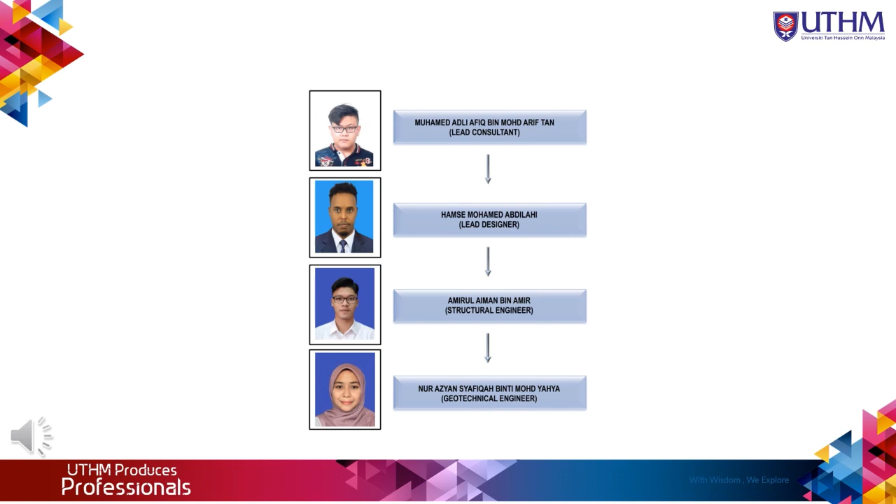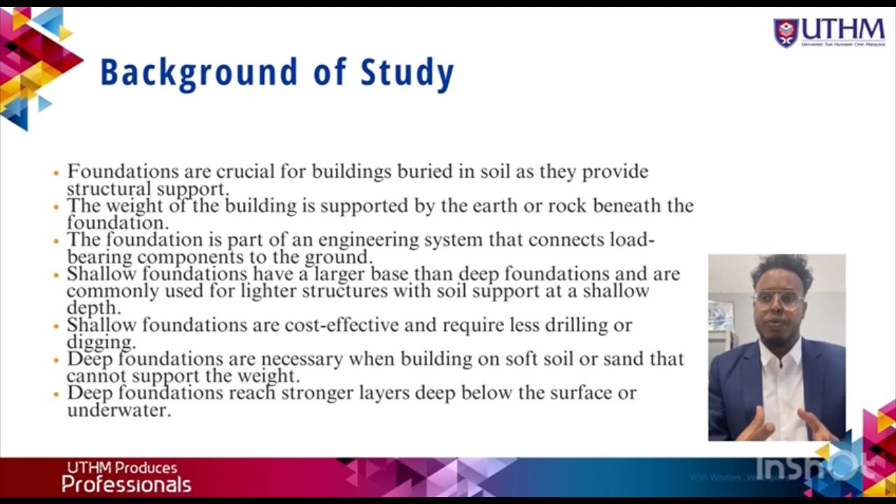Background of study. Foundations are crucial for building in the soil as they provide structural support. The weight of the building is supported by the earth or rock beneath the foundation. The foundation is a part of an engineering system that transfers load-bearing components to the ground. Shallow foundations have a larger base than deep foundations and are commonly used for lighter structures with soil support at shallow depth. Shallow foundations are cost-effective and require less drilling or digging. Deep foundations are necessary when building on soft soil or sand.

Maju Engineering was incorporated in December 2015. The company is located at Pakit, Johor Bahru. Since its formation, the company has been providing civil and geotechnical engineering services to government agencies and private sectors. The company provides specialized services right from site investigation, soil and foundation, soil laboratory, concrete testing and coring.

Project background. The project focuses on the foundation for a water tank tower with a capacity of 100 tons of water. The location of the project is at Taman Setia in Johor Bahru. The company carried out research on the suitability of the foundation depending on the existing soil at the location. Secondly, site investigation has been conducted on the site. As you see, this figure shows the site location.

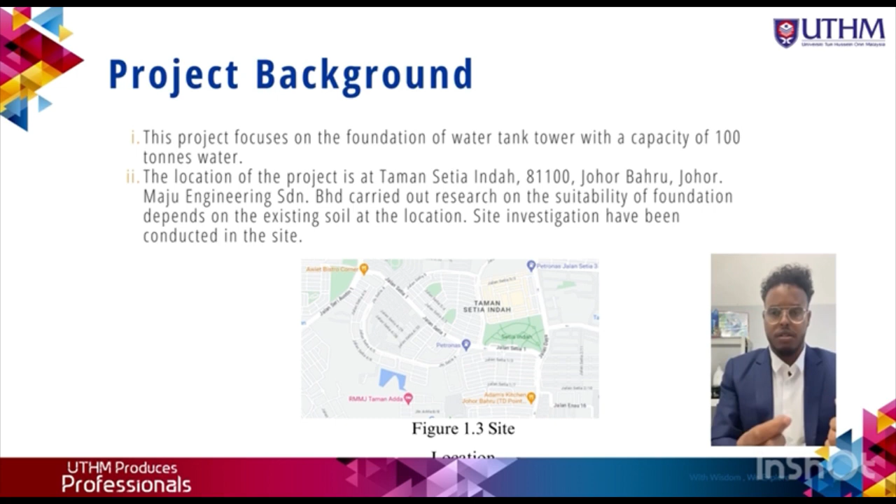Objective. This project includes the objectives listed below. First, to calculate the value of ultimate bearing capacity and settlement. Second, to design the foundation for the structure to obtain necessary information on the subsoil condition.

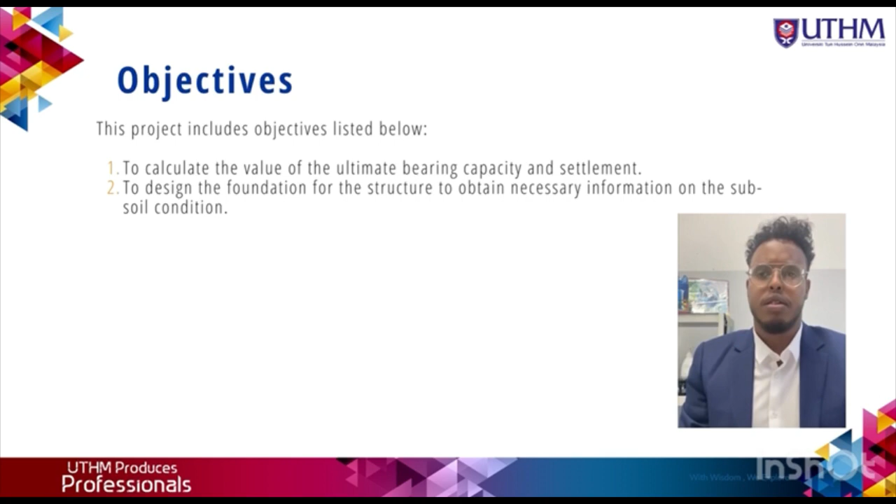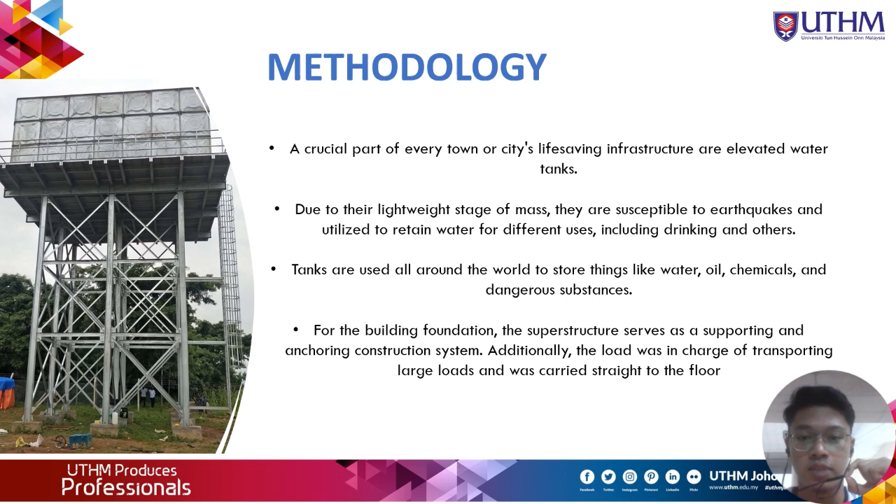Methodology. A crucial part of every town or city's life-saving infrastructure are elevated water tanks. Due to their lightweight staging mass, they are susceptible to earthquakes, and they are utilized to retain water for different uses, including drinking and others. Tanks are used all around the world to store things like water, oil, chemicals, and dangerous substances. For building foundations, the substructure serves as a supporting and anchoring construction system. Additionally, it is in charge of transferring large loads straight to the ground.

Water tank specification. We need to design the water tank using ESTEEM software and include the load values involved to get the load that the foundation needs to accommodate. The specification of the water tank is based on the load that needs to be accommodated, which is 100 tons. For our water tank specification, the width of the tank is 6 meters, length is 6 meters, area of water tank is 36 square meters, and the total elevated water tank height is 13 meters.

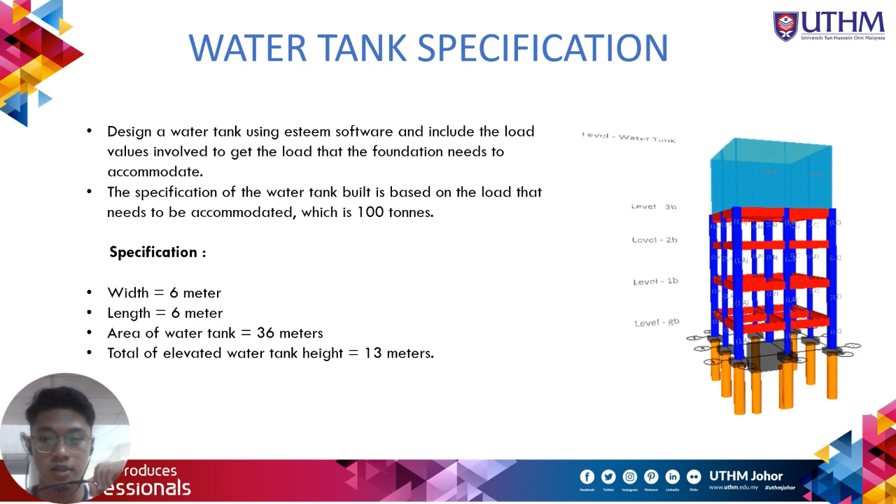Now we move on to data collection. The values for this project were obtained by referring to the Eurocode 2 standard. The structures are subsequently examined using manual calculations and ESTEEM software, especially for foundation design and settlement verification. In order to produce a suitable proposal for the foundation design in this project, the data from ESTEEM and manual calculations are also compared. So these are the pile foundation key plan and also the load on pile from ESTEEM software.

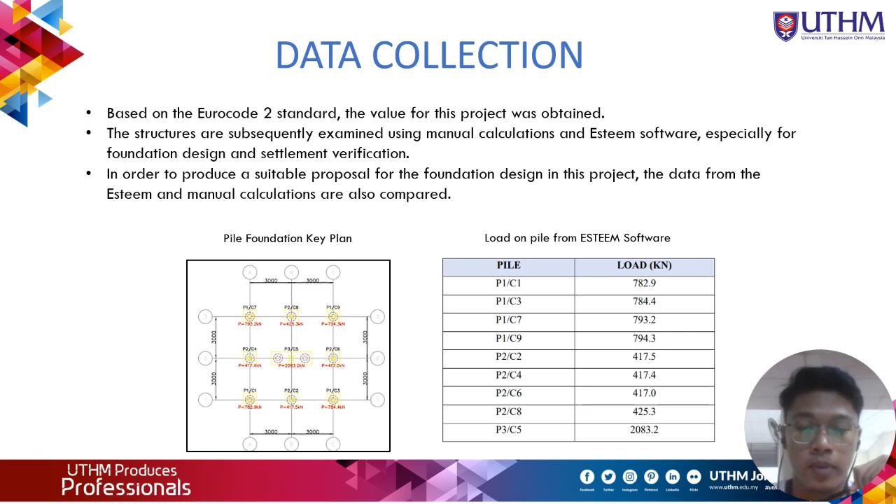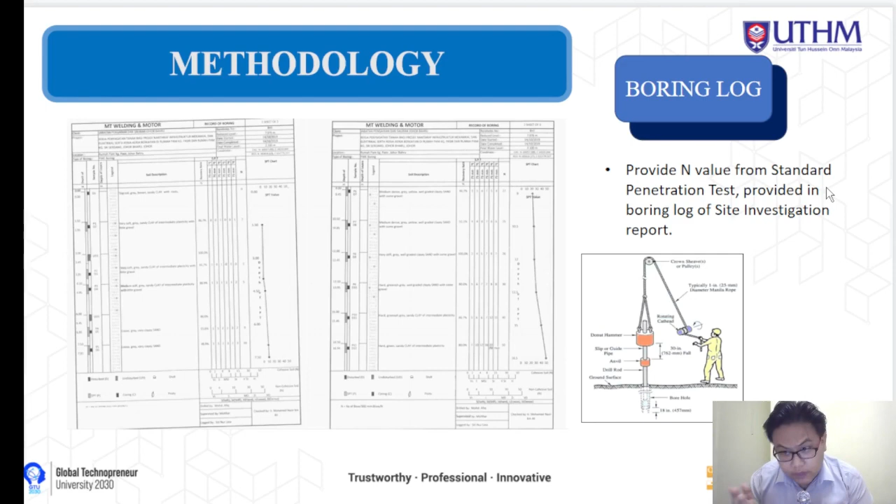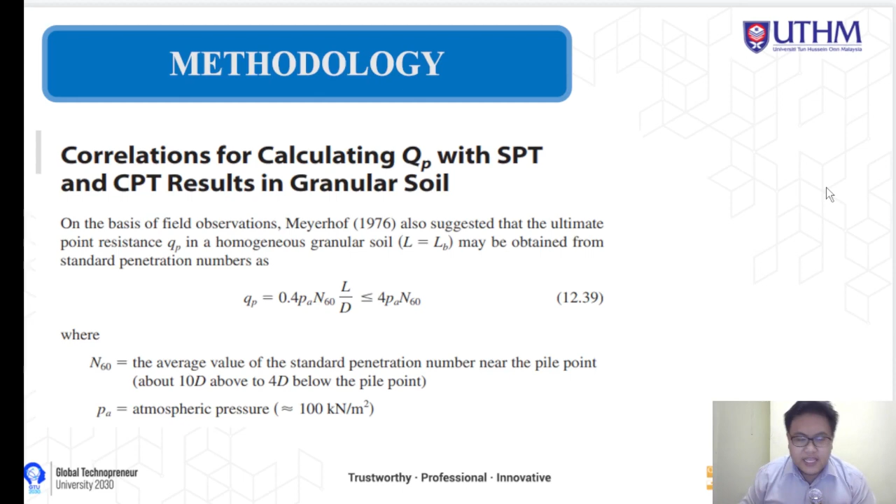Okay, hello. My name is Muhamed Adli Afiq, and I will talk about the methodology of the project. Since the site investigation report boring log provided the N value from the standard penetration test, we can use the Meyerhof equation, which correlates with the SPT result, for Qp. Qp is the pile point bearing capacity, and also Qs, which is the pile frictional resistance, which correlates with the SPT value using the Meyerhof equation too.

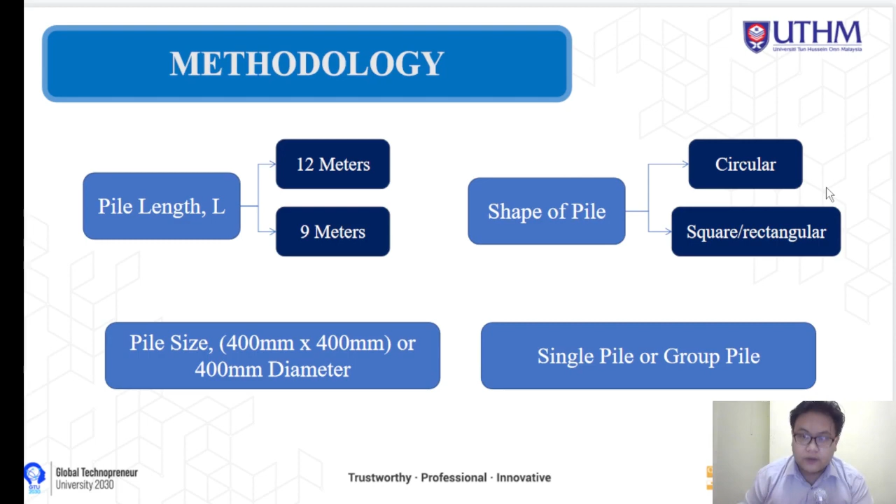The resultant ultimate bearing capacity value will determine the pile parameters, such as the pile length, shape of pile, size, which is in circumference or area depending on the shape, and whether it is a single pile or group pile. Then we check whether it is suitable for the design load calculated via Esteem software for the structure of the 100-ton water tank. Next, after we have received the suitable pile for the design load, we also need to use the settlement equation to determine if excessive settlement will occur afterward on the pile. Okay, this is the equation.

Okay, if the settlement calculated is under 50 millimeter, according to Eurocode 7, then the design pile parameter can be accepted.

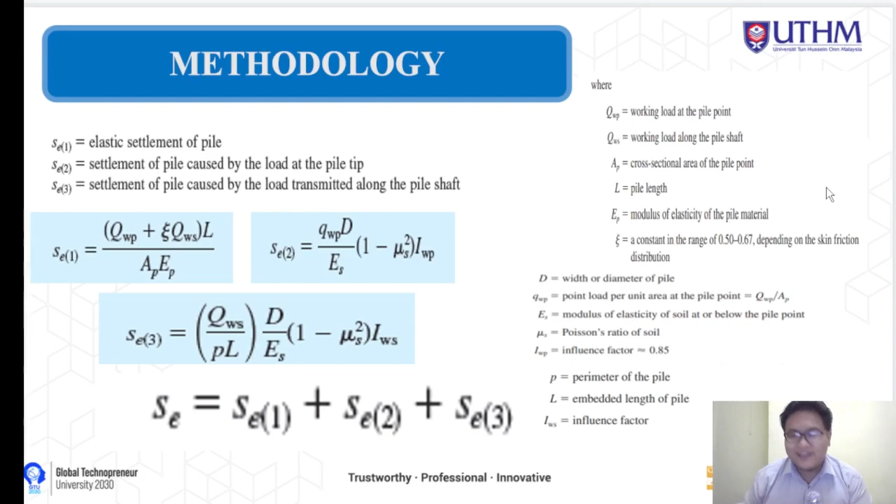Okay, for the result and discussion part, in this project, each group is required to obtain a borelog report and design water tank to determine the load to be carried by every column. The data used to perform this project were taken from the borelog of the Department of Irrigation and Drainage, Johor Bahru, Johor. The calculations were made for borehole number 1 at column P1C1, P1C9, P2C8, and P3C5 using the Meyerhof method.

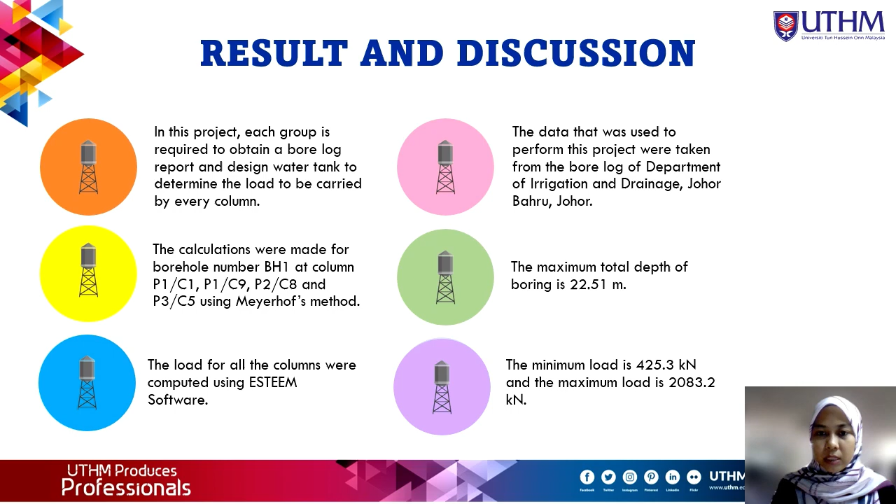We get the maximum total depth of boring is 22.51 meter, refer to borelog 1. The load for all the columns was computed using Esteem software, and the minimum load we get is 425.3 kN and the maximum load is 2083.2 kN.

Okay, in this project, we have to determine the design of foundation and perform checking of the settlement. The calculation made will determine whether the pile used will be single pile or a group pile. If the design load is bigger than the ultimate bearing capacity, it is not suitable to use single pile. Hence, it needs to be redesigned as group pile. Okay, the pile size used for all the columns is not the same.

Firstly, in case 1, we design using a circular pile with dimension of 0.55 meter times 0.55 meter. Second size is 0.6 meter times 0.6 meter. Next size is 0.4 meter times 0.4 meter and 0.75 meter times 0.75 meter. The length of pile is the same, which is 12 meter. The factor of safety used in the calculation is 3.

To do the comparison, this project also designed case 2 using different pile size and pile length. We design using a square pile with dimension of 0.35 meter times 0.35 meter with length of pile 10 meter, circular size 0.375 meter times 0.375 meter with length of pile 11 meter, and 0.4 meter times 0.4 meter with length of pile 9 meter.

Based on the manual calculation, in case 1, columns C1, C9, C8 are single pile, but column C5 is required to be redesigned from single pile to a group pile as the design load is bigger than ultimate bearing capacity. However, in case 2, columns C9 and C8 are required to be redesigned from single pile to a group pile as the design load is bigger than ultimate bearing capacity, while column 5 cannot bear the load, even if the pile acts as single or group pile.

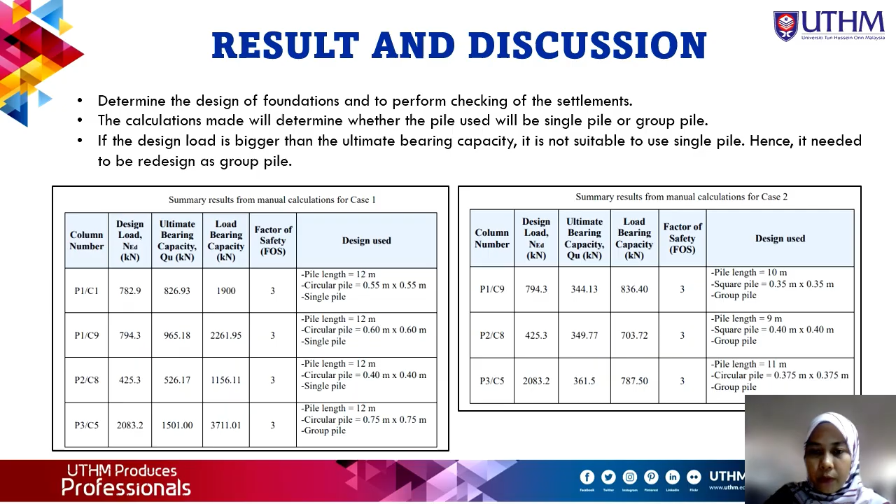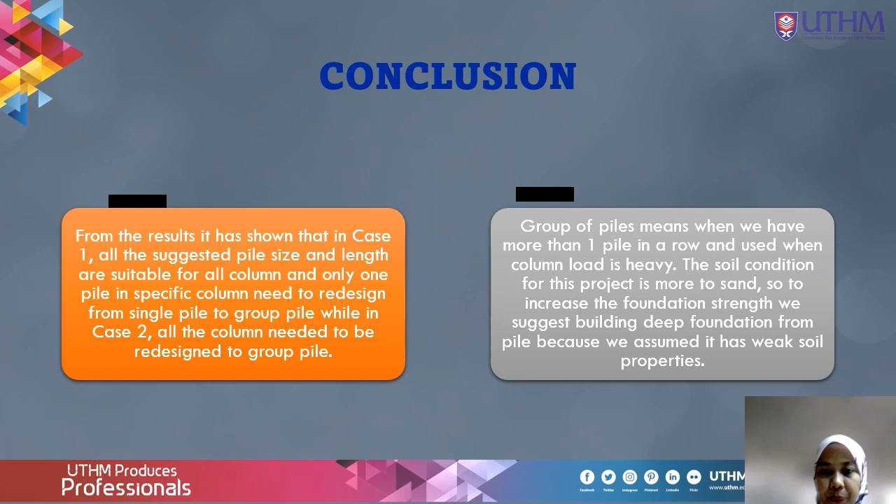Okay, in conclusion, the result has shown that in case 1 the suggested pile size and length are suitable for all columns, and only one specific column needs to be redesigned from single pile to group pile, while in case 2, all the columns need to be redesigned to group pile. A group of piles means we have more than one pile in a row, used when column load is heavy. The soil condition for this project is more to sand, so to increase the foundation strength, we suggest building a deep pile foundation because we assume it has weak soil properties.

Okay, for the recommendation, soil improvement will be suggested, which is reinforcement with stone columns. The advantage of this improvement is it will increase the strength to improve stability, reduce deformation due to distortion or compressibility of the soil mass, and reduce natural variability of soil to make it more economical.